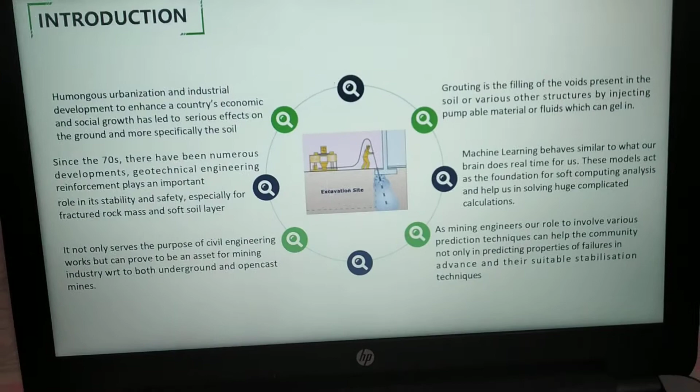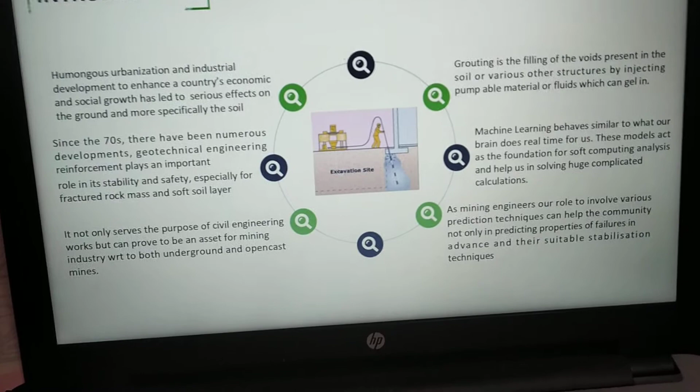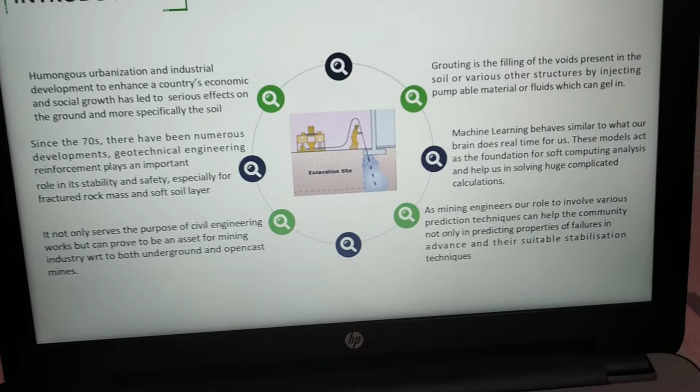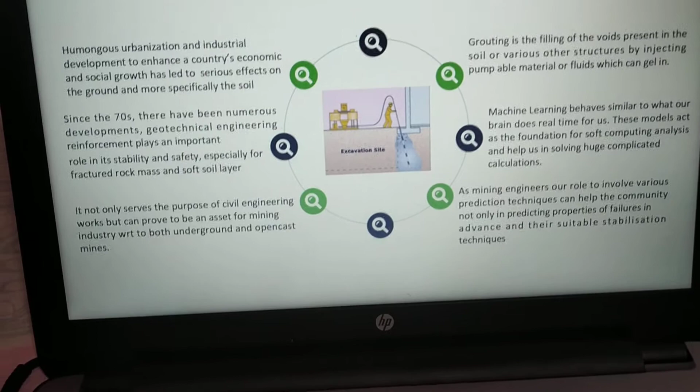Along with this urbanization, there has been huge development in the field of geotechnical engineering too, with respect to the term reinforcement, which means supporting or strengthening existing structures. Reinforcement plays a very important role in both civil engineering works as well as mining engineering works, for both underground and open cast mines.

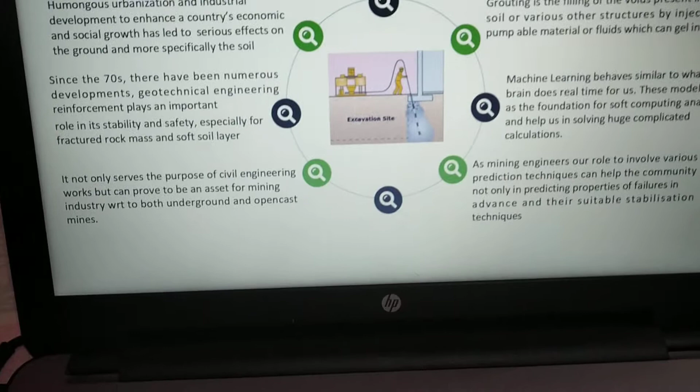So how is this term influencing the mining community? In reinforcement, we deal with the stability and safety of fractured rock masses that can occur, and even the soft soil layer which is usually present while excavating materials and minerals.

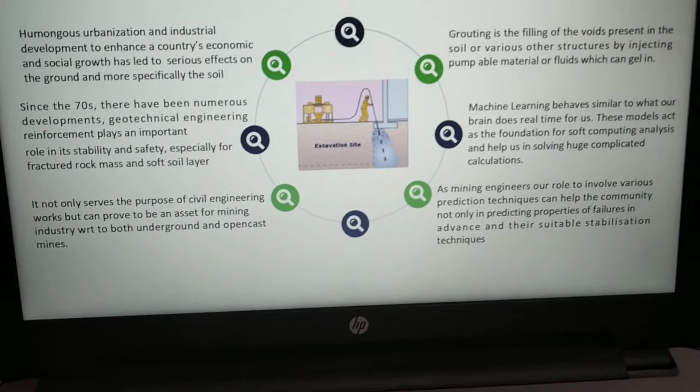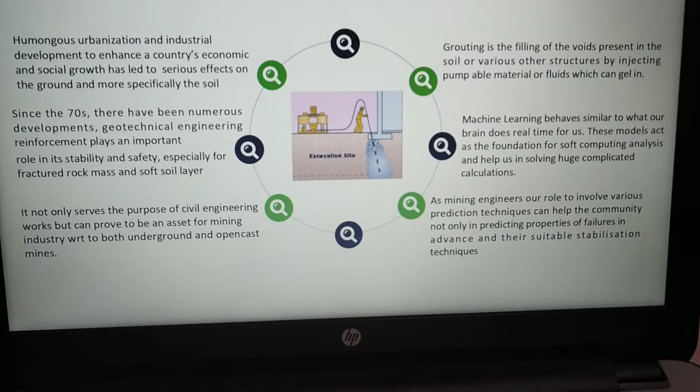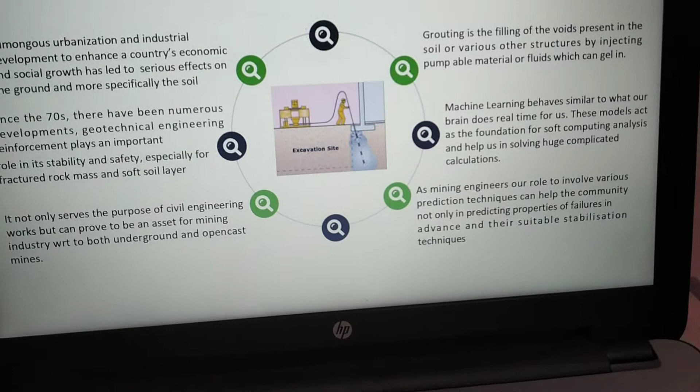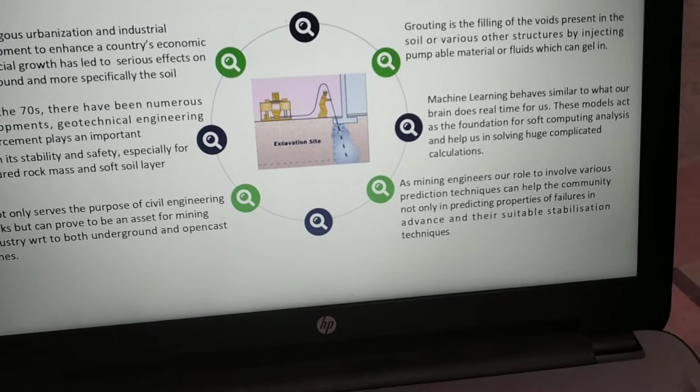For this reinforcement, one of the most common and newest techniques deployed in mines is grouting. Grouting is basically filling a pumpable material into voids, soil, or fractured rock masses using various compounds like cements, chemicals, bentonite, resins, etc., which can gel in and settle to strengthen the structure. At the same time, it can act as a water sealant to prevent groundwater flow or seepage. So in this project, what we are trying to do is combine both geotechnical engineering and machine learning.

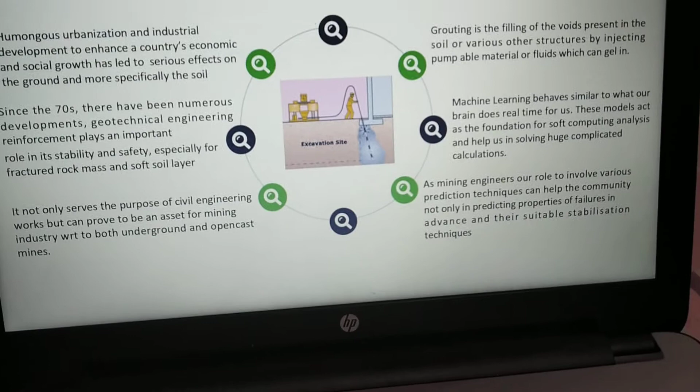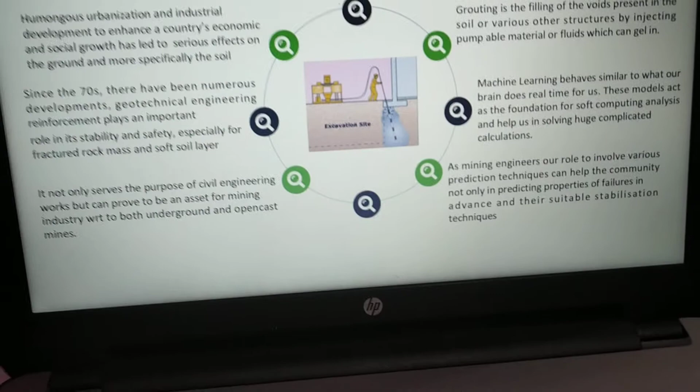So that we can use it for soft computing analysis and avoid the huge, complicated, and tedious calculations that we have to do for each data set, and predict values which will be further useful for us to predict how a certain grout will behave with a certain rock mass in the future.

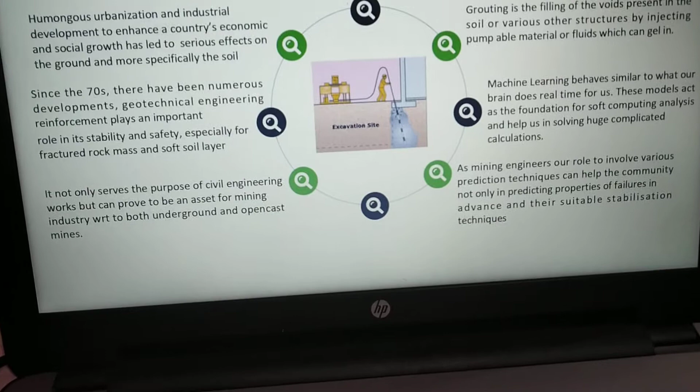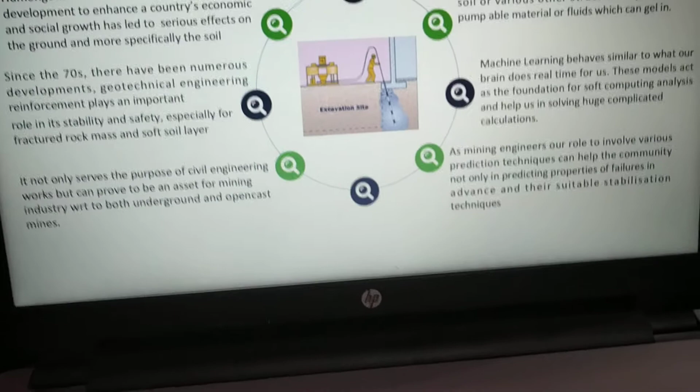As a mining engineer, our role completely involves studying the material. This study, if done in a proper manner, can help us predict and create predictive models or tools which can be further useful for the mining community overall.

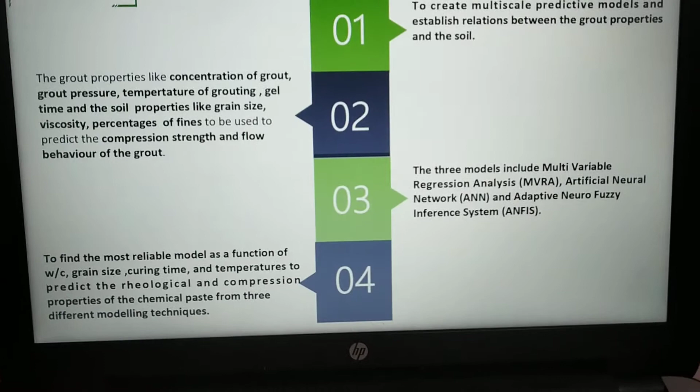Along these lines, my major objective through this project is to create a multi-scale predictive model and establish a relationship between the grout properties as well as the soil.

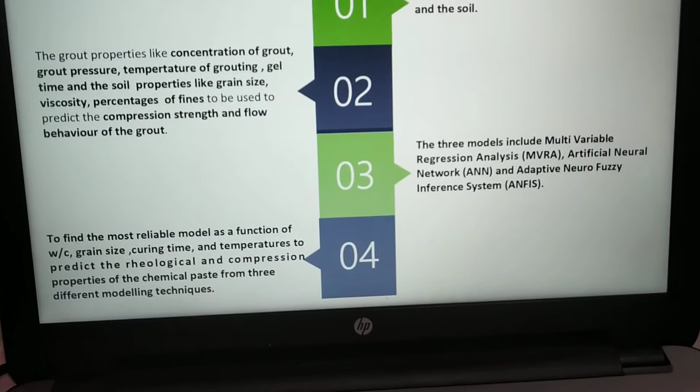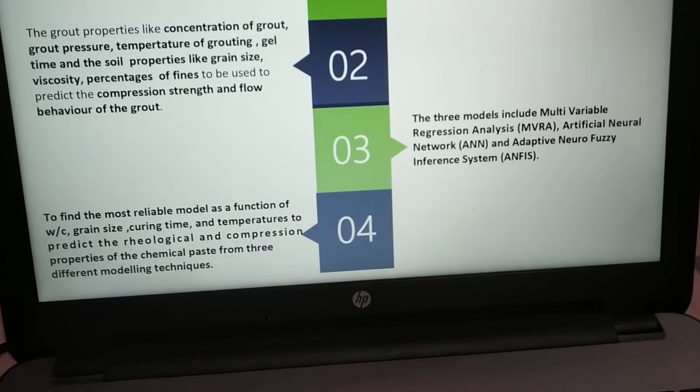These grout properties will basically include the concentration of the grout, pressure, the temperature at which the grouting will be done, the gel time, and the soil properties will basically include the grain size, percentage of fines, and the viscosity of the geocomposite that is formed, so that we can predict the values of compressive strength and the flow behavior of the grout, which is basically viscosity. So these are the inputs, and compressive strength and flow behavior of the grout are the outputs.

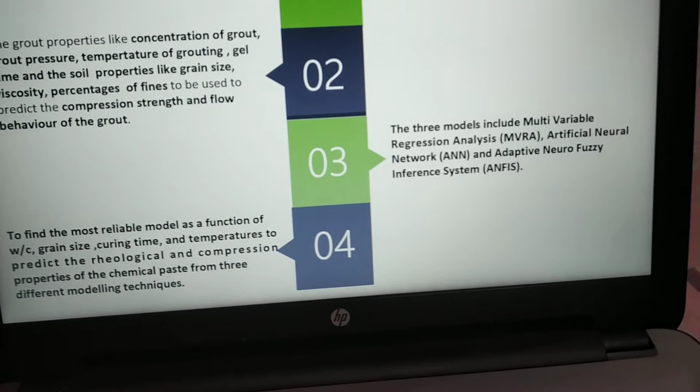For this prediction modeling, we'll use three types of models, which include multivariable regression analysis, artificial neural network or ANN, and adaptive neuro-fuzzy inference system, which is ANFIS.

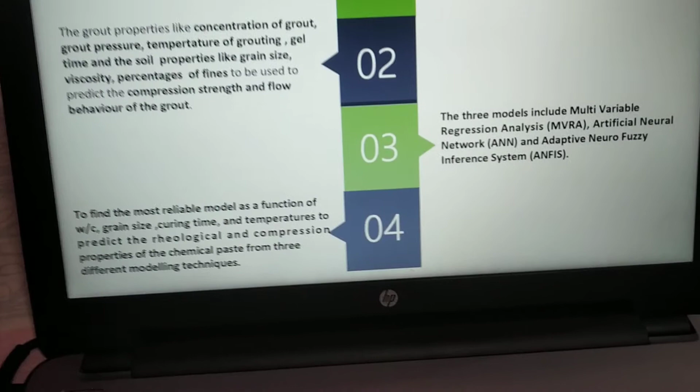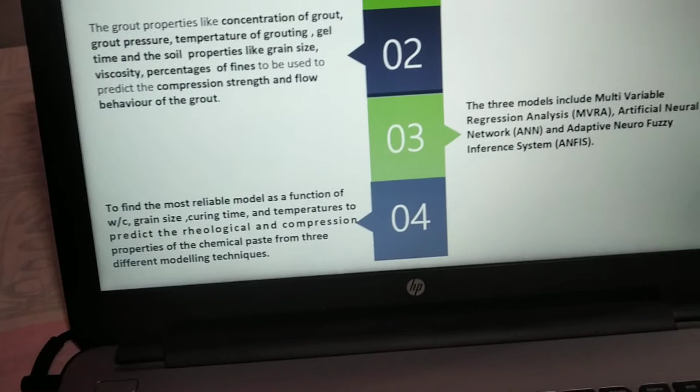What we are trying to do is find the most reliable model as a function of the water-to-chemical ratio, grain size, curing time, and temperature to predict the rheological and mechanical properties like compressive strength and viscosity of the chemical grout, used as a geocomposite, and compare the correlation coefficients we get between these input and output parameters so that we can find the best suitable model for this analysis.

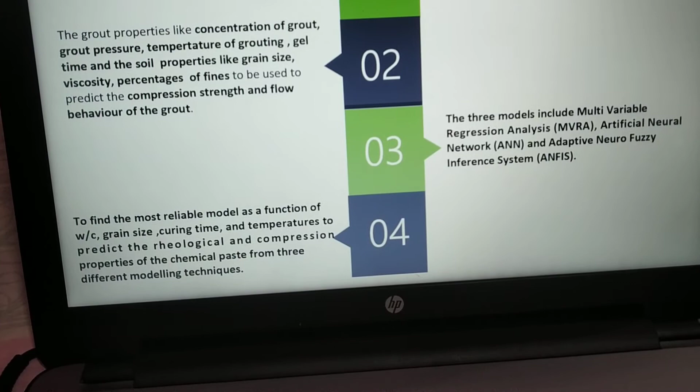So what actually are grouts? A grout is basically a general...